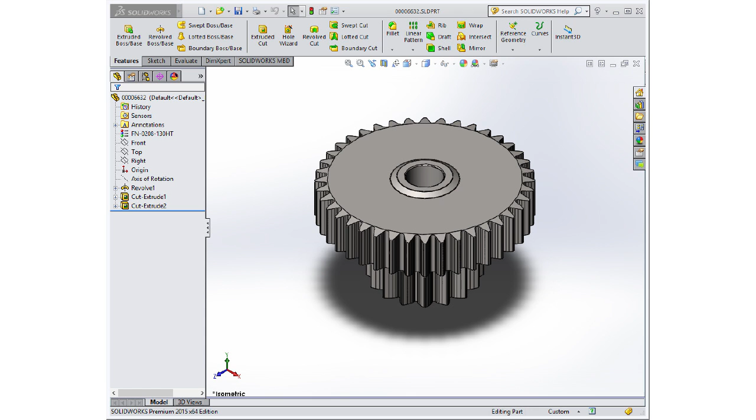But very quickly, here's 2015, the SOLIDWORKS that you know and love and are familiar with, a user interface that looks like this for years and years. And 2016. Now, one thing I'll point out is the command manager is still a command manager. The feature manager is the same. Property manager is the same. Much of the UI hasn't changed, but of course, it's lighter out of the box, and the icons. Everybody sees the icons difference.

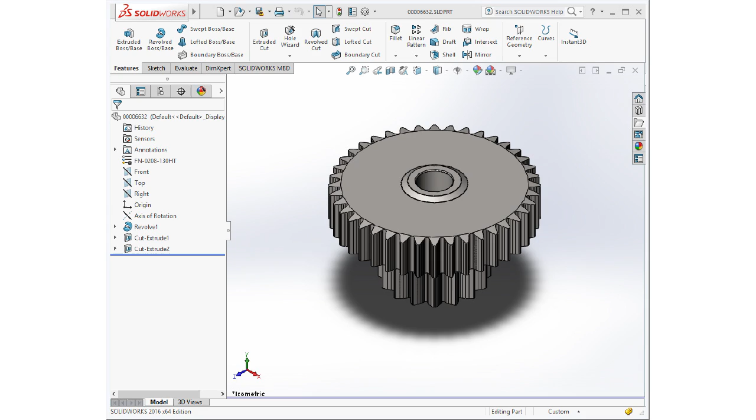Every year when we go to beta, all of us back in Boston in R&D, beta goes live, and we sit with bated breath, waiting for the comments to start coming in on the beta forums. And trust me, we read everything in the beta forums. And I realized that there has been some reaction that might best be described along these lines.

Anybody here like this? Right? Come on, tell me, who is there? I see a hand back there. There's got to be others of you. I know. You don't like the UI. You hate me, right? Come on. Nobody? Everybody likes it? Yes. All right. You're being polite.

So the question is, why? Why did I do this? Have I lost my mind? And I want to be clear about that. I own the user interface for SOLIDWORKS. This was my idea, so it's a nice red target for you all day long. You can come and talk to me. This was my proposal, this was my idea. I basically ran and oversaw this whole project.

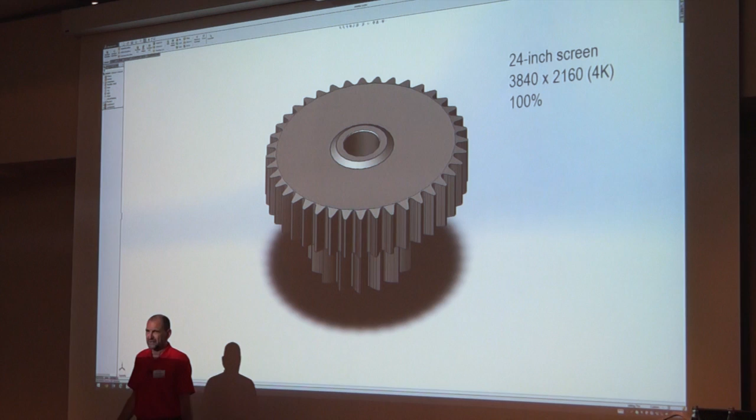Well, the problem is SolidWorks was horrible at this, right? And here's a couple of screenshots to illustrate it. This I took on a Dell 24-inch screen. It's a 4K monitor, right? And this is at 100% Windows scaling. So you can see, I mean, the whole UI is tiny. Not only the SolidWorks part of the UI, but the Windows controls too. You can't use it like this. It's impossible. Well, I suppose you could, but you spend forever just trying to get a target. Nice big model though, right?

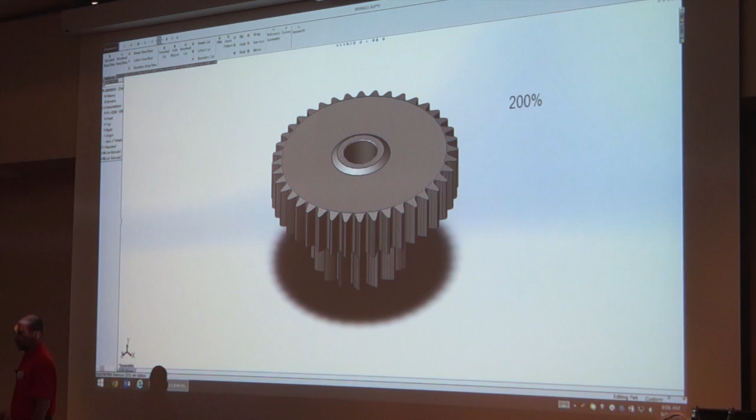We didn't do anything with the width of the feature manager, right? If you slide it back and forth, there's a detent where it's the natural width. We don't do anything with that. The tabs at the bottom, the 3D Views, are getting cut off. We're starting to get cut off over there in search commands. Let's go up to 250 and we can really see the problem, right? This is just horrible. Look at the search field in the upper corner. Look at the tabs. We don't respond at all.

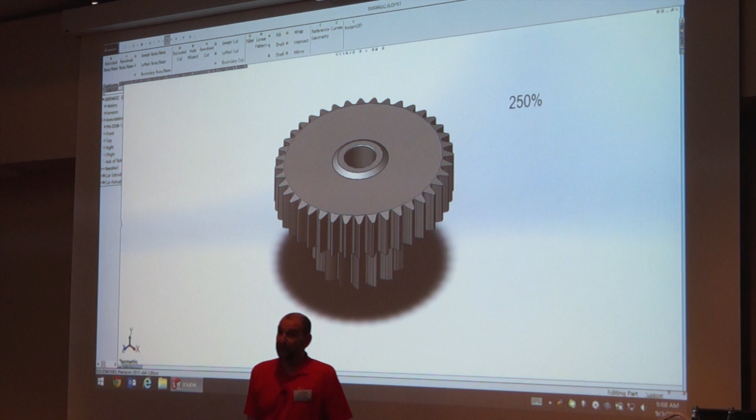And then when you start diving even deeper, this is just the top level UI. When you go deeper, you go into a property manager, and input fields are getting cut in half. You get into dialog boxes, and it's just a nightmare. Throughout the whole UI, we were doing a horrible job. We had to fix that. And that's what we did in 2016.

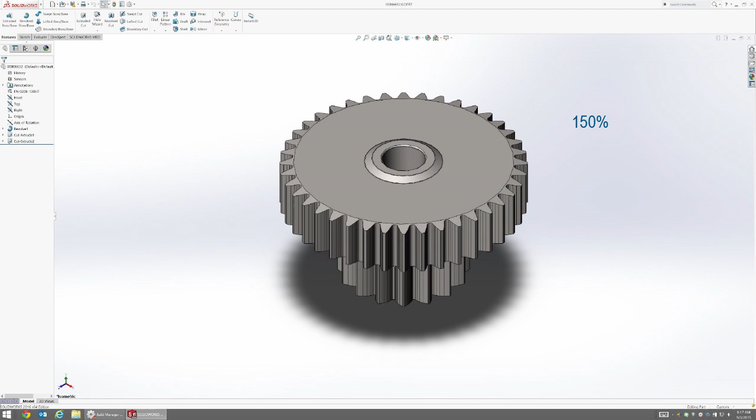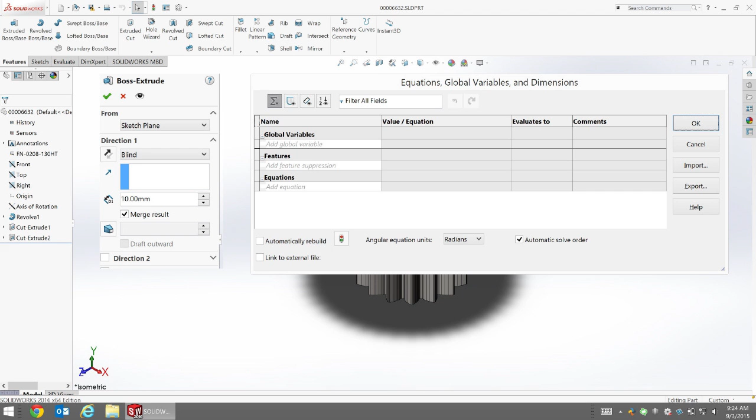So here's 2016 at 100%, at 150%. At 200%, notice what's happening. The whole UI is scaling. The icons are scaling, all the fields are scaling. Let's bump it up to 250%, and you can see. We still have a bug down there in the corner, but I'm beating up the developers on that. Let's look at the property manager and the equations dialog box. The whole UI responds to Windows scaling.

Right? This whole project was about making sure SolidWorks is going to be the best damn CAD package responding to Windows scaling on 4K monitors, 5K monitors, 8K monitors, and I don't know whether it's in a year, or 3 years, or 5 years, but I guarantee you're going to see a whole bunch of very high resolution monitors on everybody's desktops. Nobody's going to be running 800 by 600 anymore, right? Or 1024 by 768 or whatever. They're going to be running high-resolution monitors. This is the problem. That's why we did it.

All right. What about the icons? Why did I change the icons? It's like, I love the icons, right? Why did I do it? Well, the problem is these icons were last touched, created in 2002, 2003, and they shipped in SOLIDWORKS 2004. Right? If you go back before SOLIDWORKS 2004, the icons are the same, but they're solid color. Solid yellow and solid green. And in 2002, 2003, they didn't redesign them, they recolorized them. And they first shipped in 2004. All right, so that's 11 years ago.

And I want to finish on this. If you run, since beta 3, we introduced this. So we are listening, I'm not deaf to all the feedback. And we heard many people complaining about the brightness of the UI.

Remember when I said earlier, part of this project was about making SOLIDWORKS easier to change in the future. This is the kind of change we had in mind all along, and I was hoping to introduce it in 2017. When we started 2016, we didn't think we could do it all, so we put this on the back burner, but in response to all the comments, we decided, let's go ahead and do it.

And this is our first attempt. This will ship in SP0. We're not going to take it out, even though it was marked as experimental in beta. We're going to go forward with it. In 2016, you'll have these 3 choices. We're still working, I'm not happy with the dark, we're still working on it, but you'll have the light, medium, and dark.

In 2017, if all goes well, I'm going to enhance this even more, because one of the things I want to do is give you a slider, right? Just from light to dark. You just pull the slider where you want. I'm hoping I can get that done in 2017.

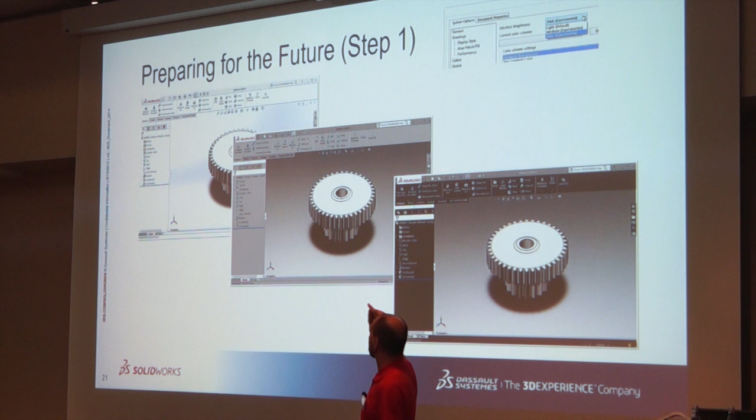I want to end, I don't have a slide for this, I want to end just giving you an overview of, as Director of User Experience, there's sort of 3 high-level principles that I use in trying to bring the UI forward each year. The first is that I want your focus to be on the model, not on our UI. I want the user interface to serve your work, and I want your work to focus on the model.

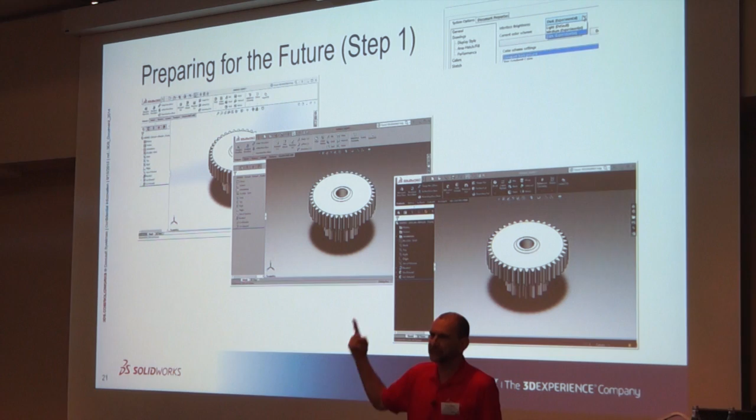The second is, and there's 2 ways of saying it: every mouse click counts, and minimize the mouse travel. In the demos today, you're going to see a whole bunch of, particularly the first, every mouse click counts. You're going to see a lot of things where it's like, in 2015, it's click, click, click, click, click, and in 2016, it's bam.

And minimize the mouse travel. There's all kinds of things in the UI that we constantly do to help you minimize mouse travel: the shortcut toolbar, mouse gestures, keyboard shortcuts, command search. If you haven't started using command search, I love that. I've got it bound to a key, and boy, that's a nice fast way to go.

So, minimize mouse travel. And the third is a realization that no 2 users are alike, and people like different things. So the idea is customization. This is one example of customization. And throughout the UI, we try to provide that.

You can customize your shortcut toolbars, you can customize your mouse gestures, customize your keyboard shortcuts, customize this, customize that, and I want to customize UI to be every bit as flexible as all those other things.

I'm here all day, I'm in a bright red shirt. Don't confuse me with this poor guy.